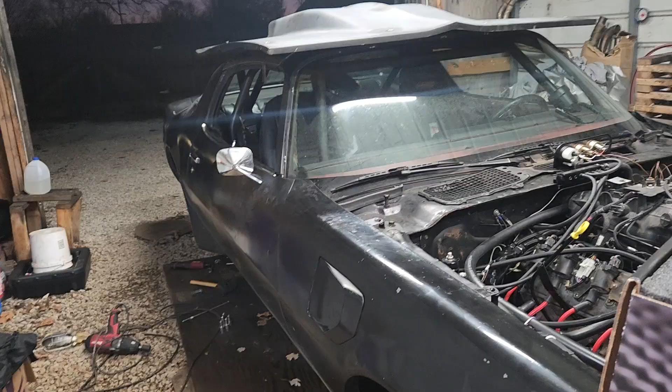Hello YouTube, got some more parts for the 80 Trans Am. We got the BTR Equalizer Intake.

The truck intake works fine, it's just ugly. I think this will work better for us.

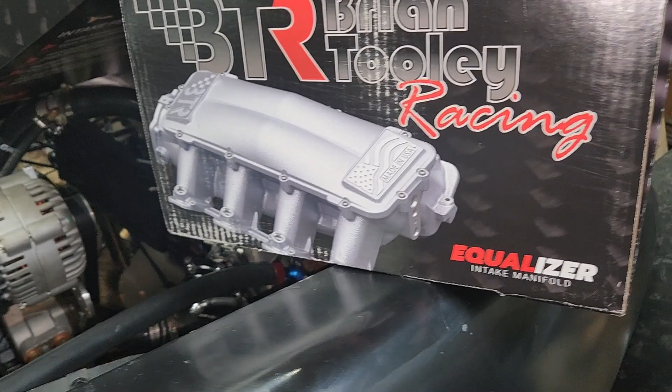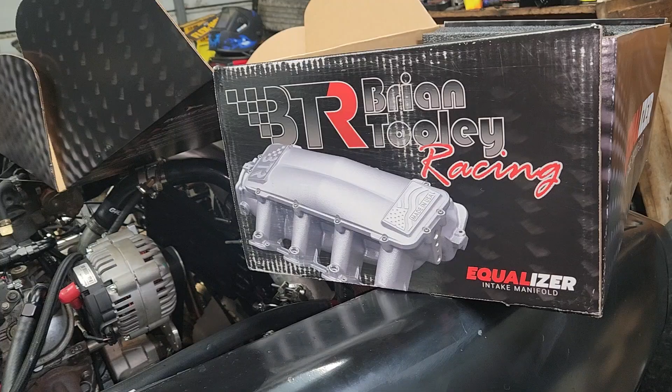This intake operates between 6,000 and 8,000 RPM. It's a short runner, but once we get going, it never sees under 6,000 RPM. 6,000 to 8,000, is that what I said? But yeah, we shifted about, I don't know.

Even if you shifted it at 65, it don't drop below 6,000. But that's just with the sloppy stage 2 cam that's in it now. We're going to put a bigger cam in it, and then we'll be shifting at 7,500. That intake will really shine at that RPM, I think.

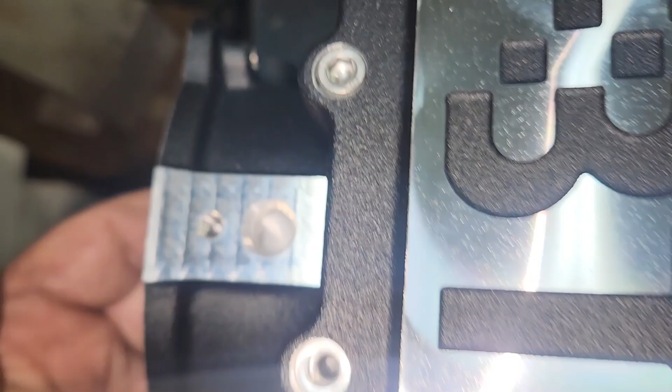And we got this throttle body. Now there are some ports on this thing that we either have to plug or use. So there's these ports in the back. There's that port right there. Well, that's not a port. Never mind, that one's solid. But there's this port right here too.

Sometimes on these intakes, there's a really big port that needs plugged on the bottom of the intake, but for some reason this one don't have that. And I've seen these equalizer intakes with that, so I don't know. We're going to figure out which ones we're going to use and then plug the rest. I'm pretty sure we only use one of them, which would probably be this big one.

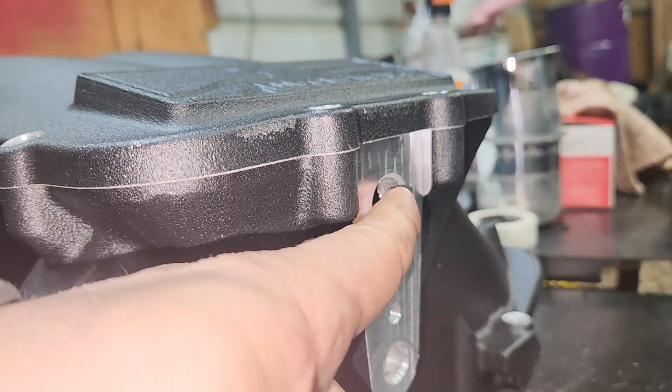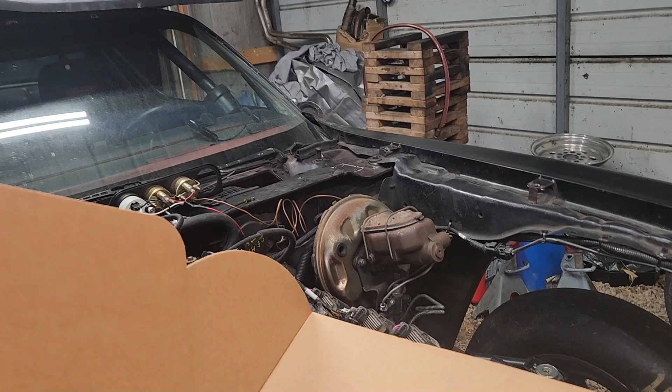That generally goes to the brake booster. Oddly enough, even though we have the power assisted brakes that's supposed to have vacuum to it, we don't run the vacuum to it because it causes a vacuum leak. That's brand new. I know it don't look like it, but it's not that old. Chris put that on there not too long ago, and it's got a vacuum leak already.

But we're going to switch to manual brakes eventually. Believe it or not, the brakes work better without the vacuum. It's probably because it's got a leak. But anyway...

We're going to go ahead and plug all these holes. See, that's a fake hole too. Yeah, we're going to plug all these holes except for this one. We're going to use that one. It does come with some fittings.

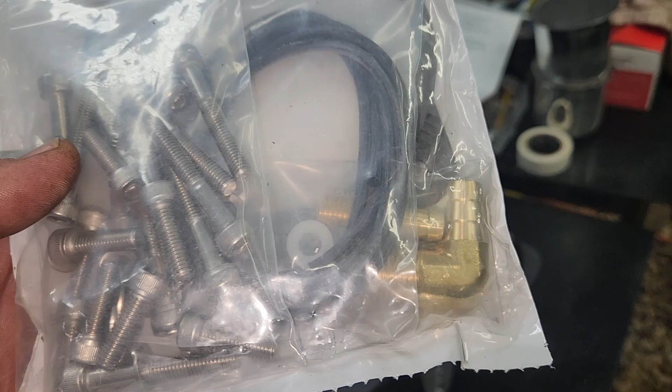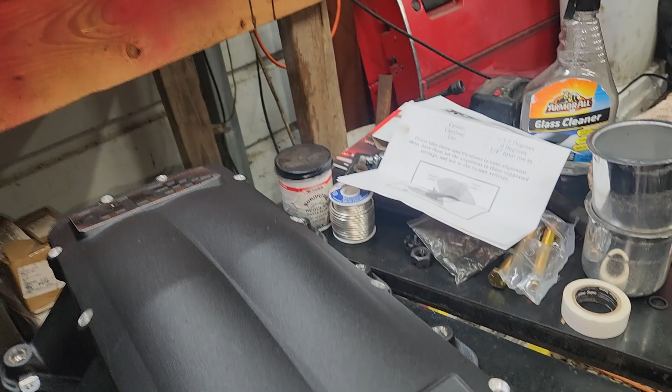And the rest of them we're just going to get plugs for, and we're going to use some Teflon tape on the threads, of course, because these are NPT threads. All right, and it comes with these bolts, I don't know, about 2 inches long, and they had a washer.

So I'm just sticking all those. I'm assuming those are the intake bolts. And these use this, but there's a gasket in here. I need to make sure that gasket's in there.

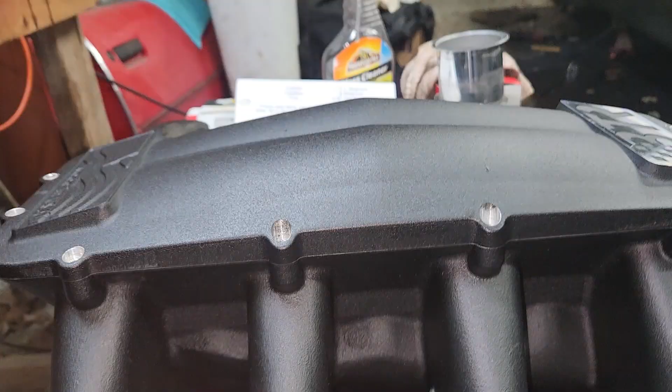So they left 2 of them in just to hold it all together. We're going to take that out and make sure that gasket's on inside there. I guess they have it like that so you can take the top off and port it. I don't know why else it would be like that.

And it came with a throttle body gasket, 4-bolt. But yeah, let's take this off. I took the 2 bolts out. They had one there and one up here.

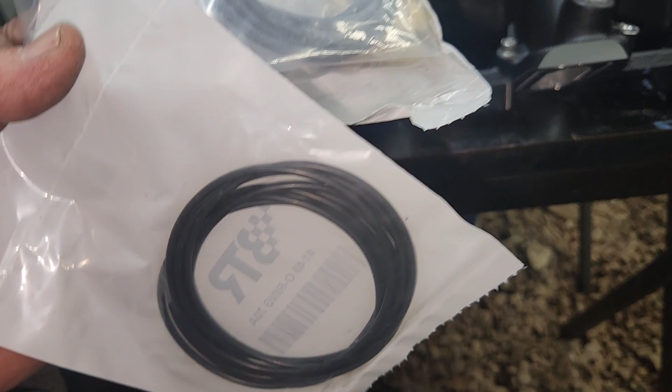See what the gasket looks like. And it does not have the gasket in it. So I'm glad I looked at that. I found another bag in there.

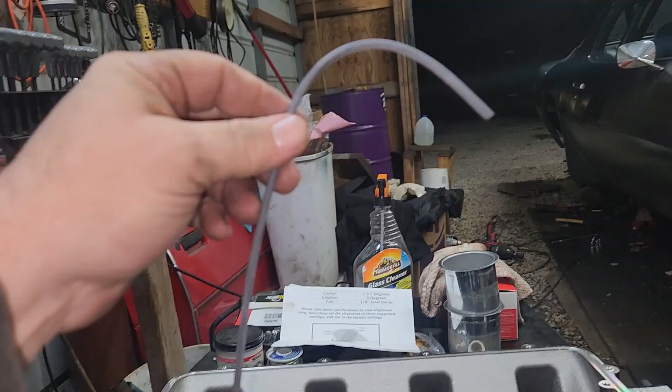So one of these is that gasket, and then the other one are these gaskets. So these smaller round ones, those are definitely the intake gaskets that go in there. And this long one is the intake gasket. I don't like that. I wish they would have made that to fit.

I bet we're going to have to cut some of this. All right, we snaked her all around there, pushed it in. You can only push it in so far with your finger. But as I expected, it was going to be too long. See?

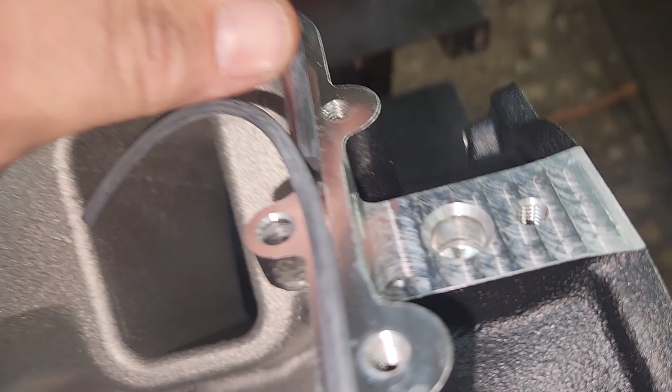I'm going to go see if I can't find some directions on that, because if you don't cut that just right, you're going to have a leak right there. I wonder if you're supposed to use silicone or anything there. There ain't no directions on the box, I don't think. Let's look more. Well, there are directions.

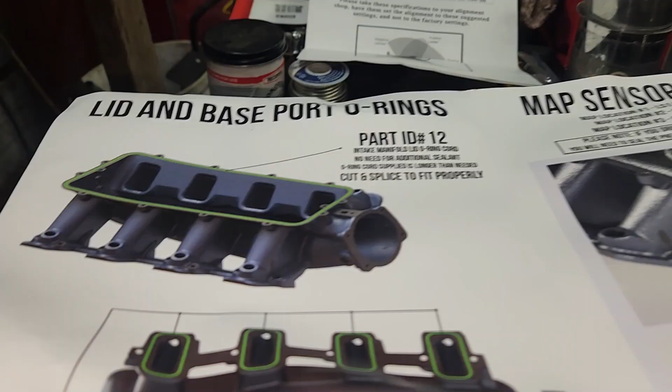Intake manifold lid O-ring cord. No need for additional sealant. O-ring cord supplied is longer than needed, cut and spliced to fit properly.

We'll have to be real careful here, because if we cut that too short, you're gonna leak vacuum. I don't know if that's a good idea or not, but I'm gonna put it right beside it, like that right there, and then cut straight down, right, just to the right of this other one. Actually, if I do it right in the middle, when I put it back over, it'll be too long, but I'm gonna go right where my thumb's at.

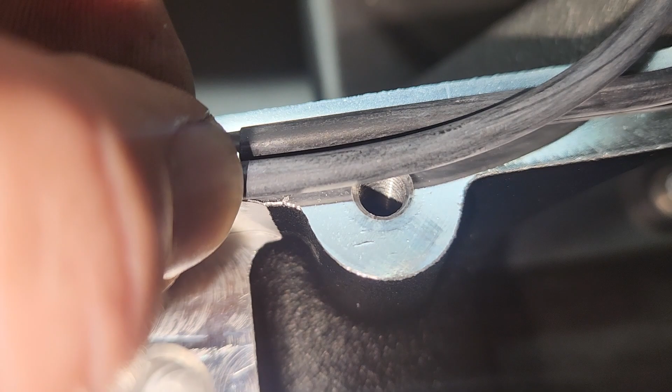All right, look at that. I think that'll work.

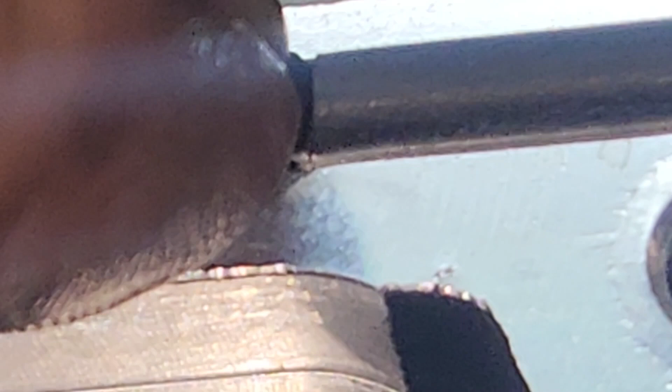Once you put the lid on it and smash that down, yeah, I think that's good there. All right, I put the bolts in.

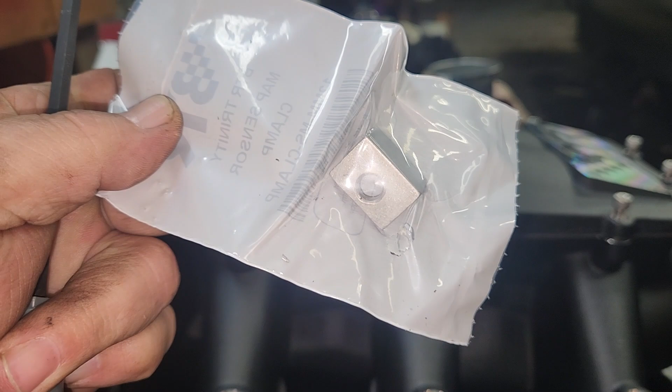I had an extra bolt. I'm going to assume that's for the MAP sensor bracket, but we'll see in a little bit. Let's tighten these down. I don't know what the torque is on them.

I'm going to snug them up for now in a crisscross pattern. I'll go here, there, there, there, there, there, there.

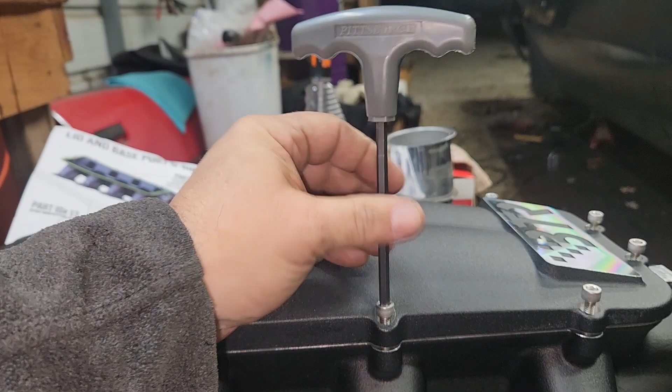On this first pass, I'm just going to snug them up, then I'll do another pass a little bit tighter, and then I'll figure out the torque, and we'll do the final pass with the torque.

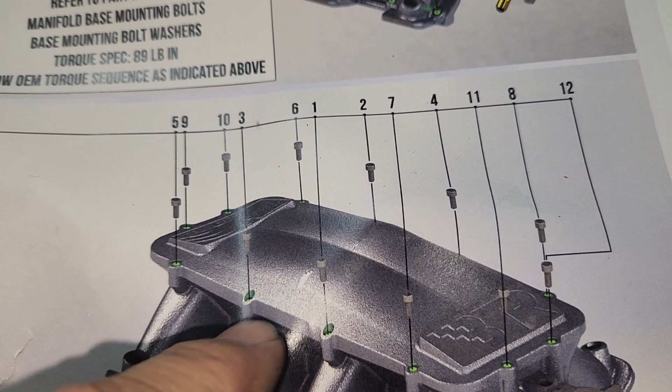So it's 89 inch-pounds, and they have a torque pattern. See, 1, 2, 3, 4, 5, 6, 7, 8, 9, 10, 11, 12.

Pretty much the same thing I did. I just kept snugging these up in the pattern I showed you, and every time I came back to the first one, it was loose. Now I got it to where I just snugged them up, but when I came back to this one it wasn't snug anymore.

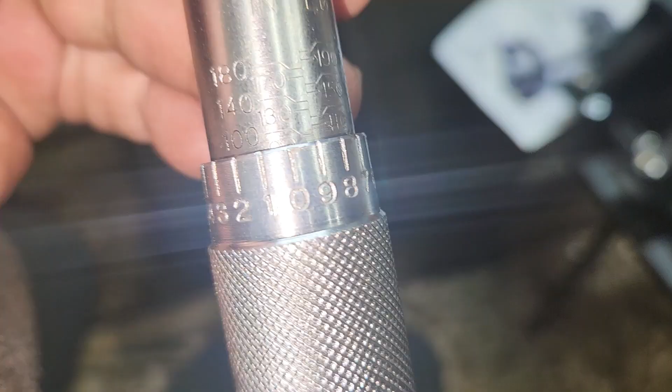But we'll do the 89 inch-pounds now. All right, there we go. We're at 89, that's the 90 right there.

All right, here we go. We'll probably go through it a couple of times. And ta-da, that's on. So back here, we're only going to use this one big port.

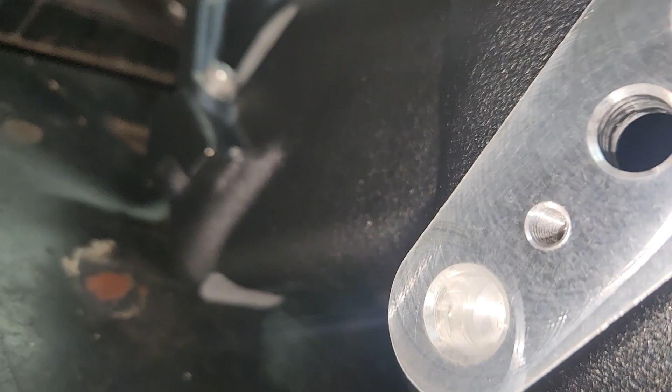So we're going to cap the rest of those and cap that one. Up there it says map location number 1, LS1 sizing, not machined for use, which would be the one on the front.

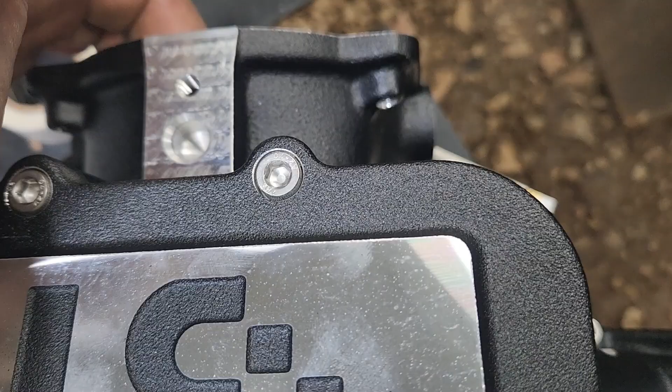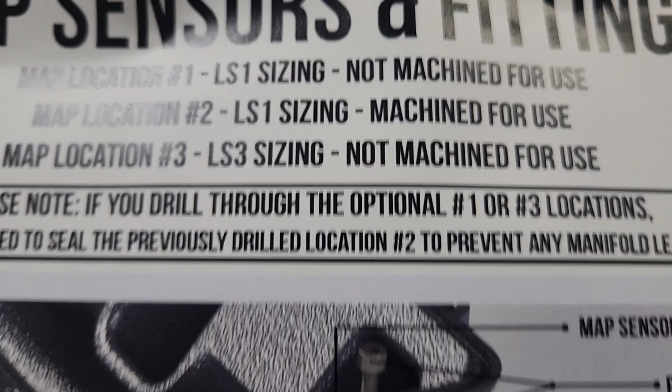And then back here, it says map 2 and map 3 location. Map location 2, machined for use, number 3, not machined for use, so we don't have to worry about that bottom one.

We can put a map sensor. We do have a 3-bar map sensor, we just don't use it because we're running the Haltech Rebel, and it just uses a vacuum line for boost and stuff. But let's go ahead and put this one in this hole.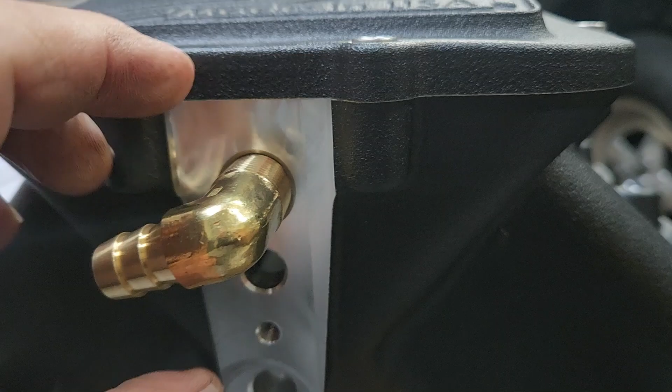We'll get some Teflon tape to put on there. Now, I did put the map sensor on there and I did plug it in, but we don't use it. I think I'll do the same thing on this intake - we'll just put it in, we just won't use it. It ain't using it, it's just plugged in.

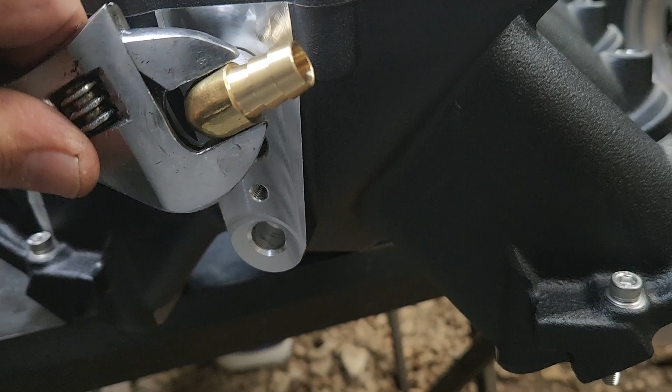But in case we ever want to use the map sensor, all we got to do is switch it in the tune. All right, I'll put some Teflon tape on her, just going to use this and tighten her up. We want it to face that way.

So unfortunately, with that in there, our map sensor don't fit, so I'm going to cut the ears off of it. A pair of dikes make quick work of them tabs, and it goes in there now.

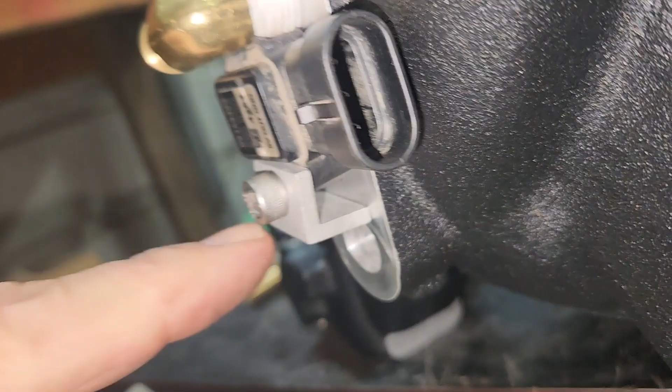There ain't no directions how that goes on there, but that's the only way I could think it goes on there, so I didn't cut the tabs off this side. The bolt went right down in between them, and then that grabs on the ledge there. Yes, sir. It ain't going nowhere, it's in there good.

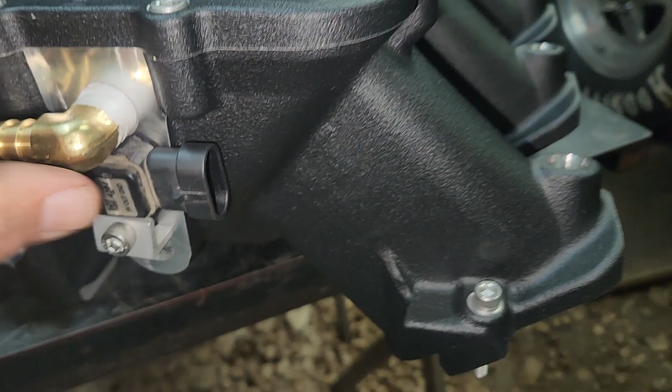Alright, and they give us this one and a plug. So we're going to use the plug up here because we're going to run it - we got a vacuum block on the fender well. That vacuum block, everything runs off of it, and we just have that one hose coming off right there for it. Alright, we got that one Tefloned up.

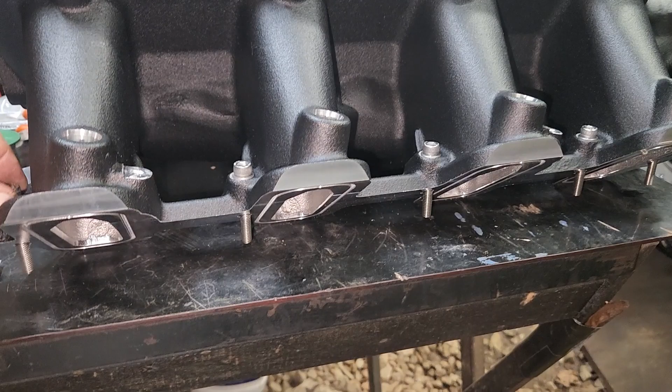Put that one in there. Now we're just going to take these out for now, flip it over and put these gaskets in right there.

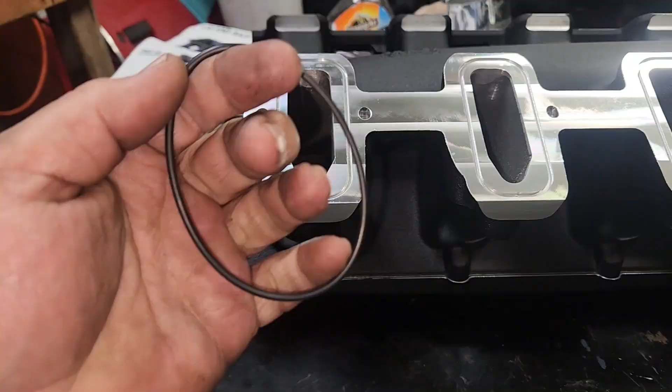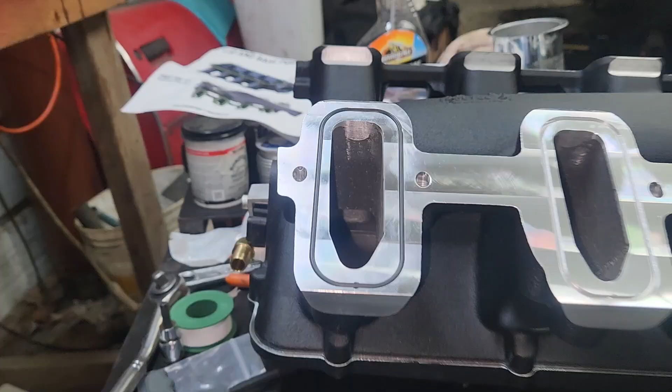Alright, these ones are not cut to fit. Again, same thing, just push them up in the grooves. And those actually push in there far enough to stay, but then they stick out just enough to seal on the heads.

Alright, there we go, they're all on and pushed down in there, and it's still sticking out enough to seal on the head. Well, look at that, I missed the hole - there was one in each side. We plugged that one, we're going to have to get another plug for this side.

Alright, let's go ahead and take this ugly truck intake off. Unplugged everything that went to the intake, the hose that goes up to our vacuum block, the hose for the wastegate pressure that came off this side over here. Now we're just loosening up the fuel rails and the intake bolts across through there, 5 on each side. Alright, there we go, truck intake off.

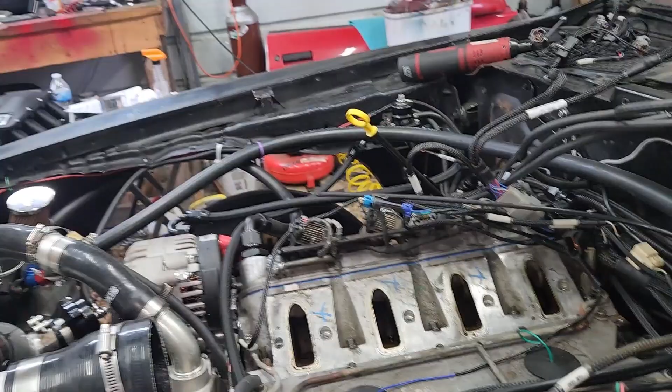Now we'll just go ahead and throw the BTR one on there, making sure we don't get in the way of any of the wires. Alright, we got our cinch down. Just looking around, making absolutely sure we didn't get any wires.

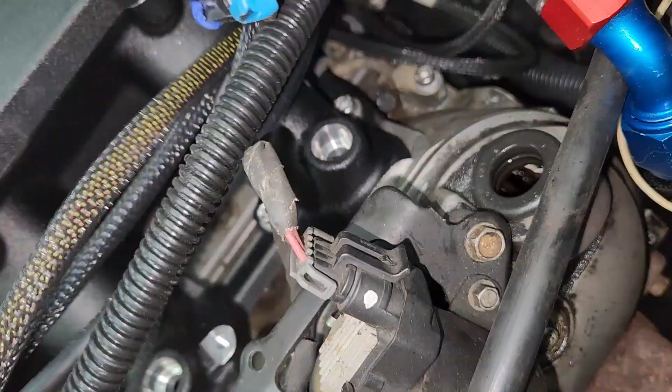Looks good to me. Now we can torque her down per the directions - 89 inch-pounds. Start in the middle and go out. Chewy, it looks good in there.

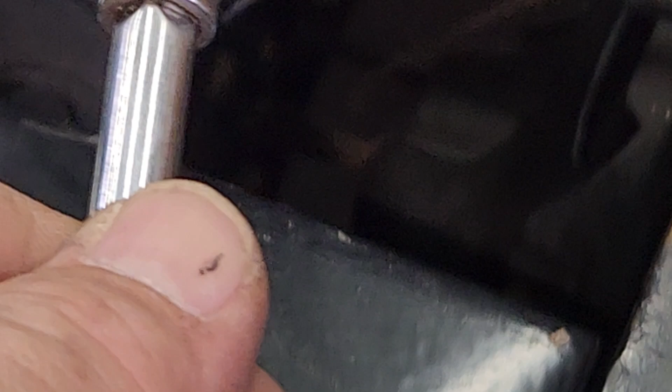So I'm taking these out. I don't even know what size that is. Let's see if we can see. Five 30-seconds, works pretty good. Those have got like a little bolt on the end of them. I screwed that out.

Unfortunately, that one's only got 3. That one's got 4. But I got another truck intake in there I can take one out of.

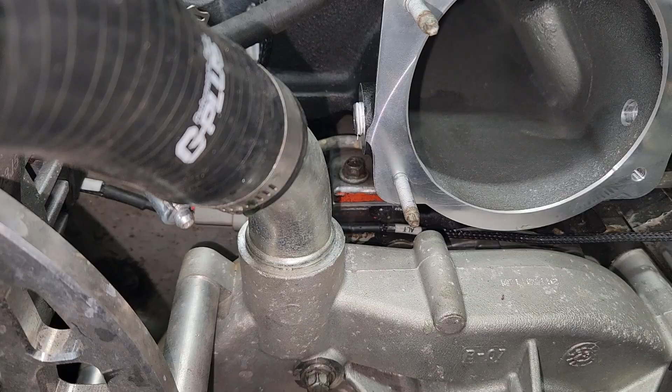Well, we've run into a problem. This right here, on there, like that right there, I'm gonna hit the water pump snout. You can run the LS1 water pump, but the problem is our bracket won't work anymore.

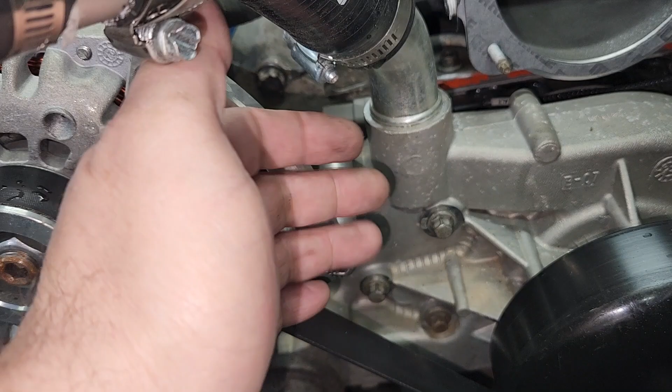We'll have to buy like $80 spacers and an LS1 water pump, and then we'll have to cut these spacers down so this will still work for us. We'll have to cut all them spacers down however far the spacer is to push the water pump out. And there is a special throttle bracket that you have to buy for this, and special fuel rails we have to buy.

Alright, so I ordered the 0.7, 7/10 of an inch spacer that brings the water pump out. This is the truck water pump, so we're gonna have to switch to the LS1 water pump. The reason why is because the LS1 water pump has the water neck coming out right here. See, if it was coming out right here, it would clear all that, and plus it would clear this belt. But yeah, I ordered a plug, ordered the throttle body bracket, ordered the fuel rails, and then ordered the spacer to move these out.

Took the water pump out. That throttle body fits on there now. That's a monster, man. That's a monster throttle body.

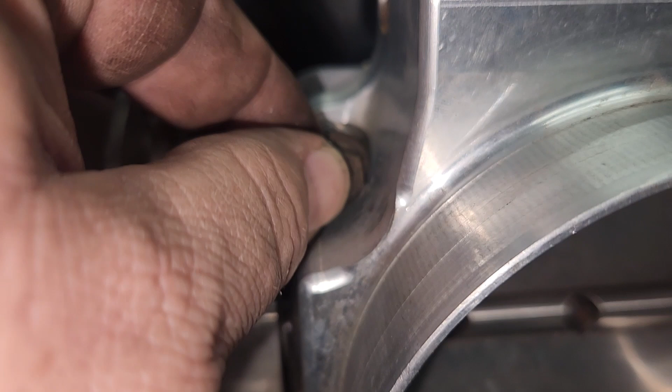Well, something else I figured out - this is the stock nut. It won't fit because it's got that washer top looking thing on it, whatever they call that. But yeah, it won't fit on there because the washer looking part of the nut hits the throttle body.

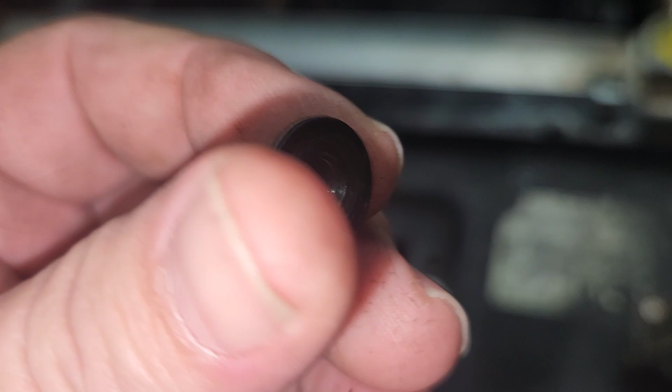Alright, got some nuts for the throttle body because it's so tight in there. These stock top washer nuts wouldn't fit, and I can't even get a socket on those, so I might have to do a wrench. And this one, I'm gonna have to take the idle air control off just to tighten it.

Alright, throttle body's on, all hooked up. Boop, boop. Alright, so I was just checking something on these, making sure the bolts weren't gonna be too long.

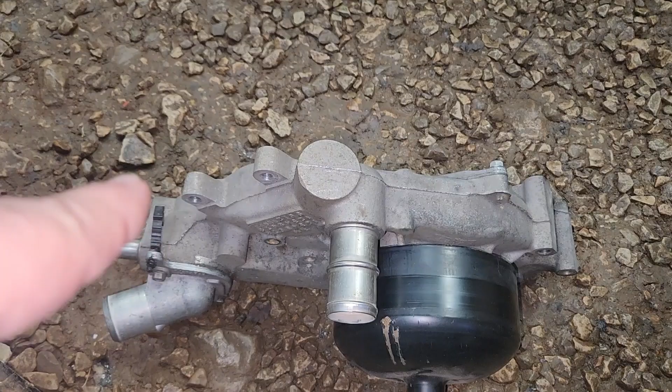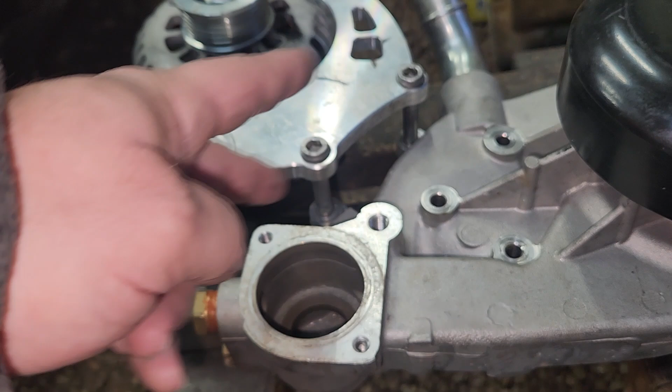I cut these down because here's the LS1 water pump - I found this one for 20 bucks off a guy I know. Now see, those two bolt holes are the same as where they're at on the truck one. So if we space that out 0.7 inches, we had to take 0.7 off of these to make that shorter.

This bolt right here should be the exact same because it went to the head. But these bolts were almost too long - you can see even after shaving them down, I can get them in there, so they're just the perfect size. But yeah, I cut these down 0.7 inches, so I'll just have to clean it up a little bit.

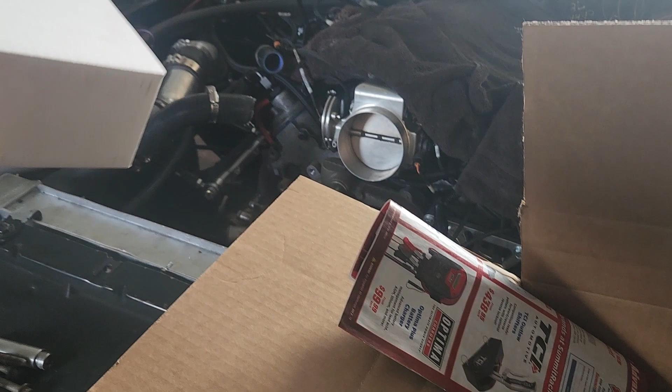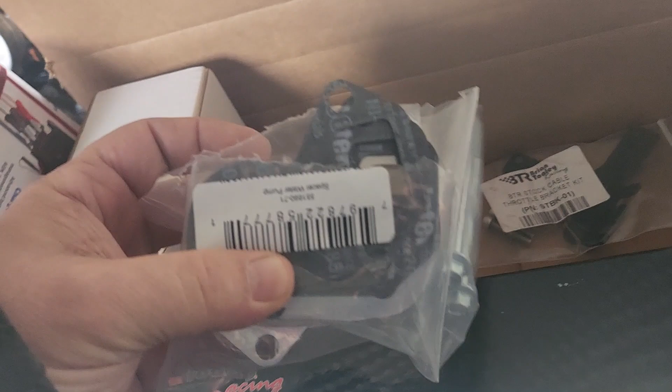Yay, we got parts. We got the throttle bracket, we got the water pump spacers. Oh, actually, this is the coupler - this is the coupler from that pipe to the throttle body. This is the throttle bracket. And this is the water pump spacer to give us truck spacing off an LS1 water pump. And this is our fuel rail.

Let's go ahead and toss this water pump on for reals. For reals, man. Alright, we'll put those on there just like that right there - be a gasket, the spacer, and then a gasket on the end. It comes with longer bolts for you.

And it comes with this little hole - you can put a nipple here, or it comes with a 1/8 inch NPT plug to plug it. But you can run your steam pipe, your head steam pipe, over to that port. And we're going to put it right there. I'm not sure if we're going to use it just yet or not, that's why I left it open.

But let's try to hold all this together, put that on there all at the same time. Alright, that's on there, leave there - clears everything good.

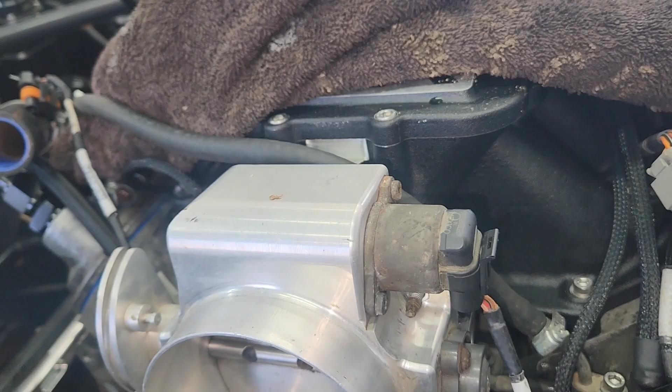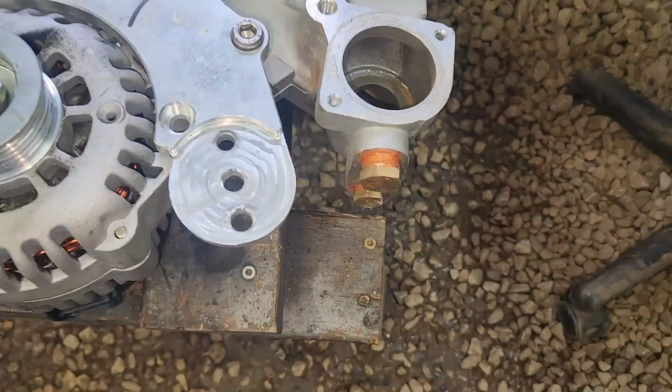I don't know if we're going to use that plug hole and just loop that around, or keep it where we had it - we had it in stream with this upper radiator hose. And I was hoping it would get these far away from this V-band so we could run that rubber loop, but it's not. So I'm going to have to tap and plug those again like we had on this one right here - that's the truck one. See where that neck comes up, it was hitting our throttle.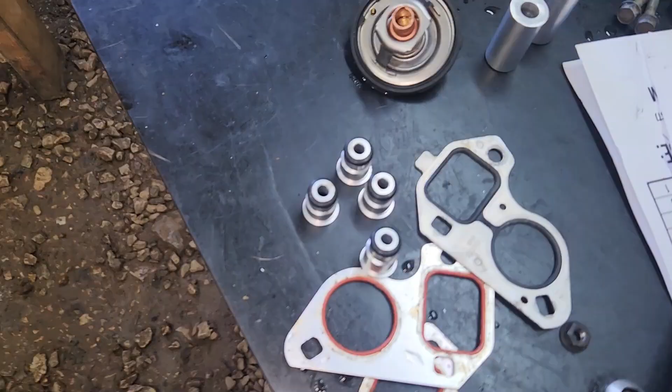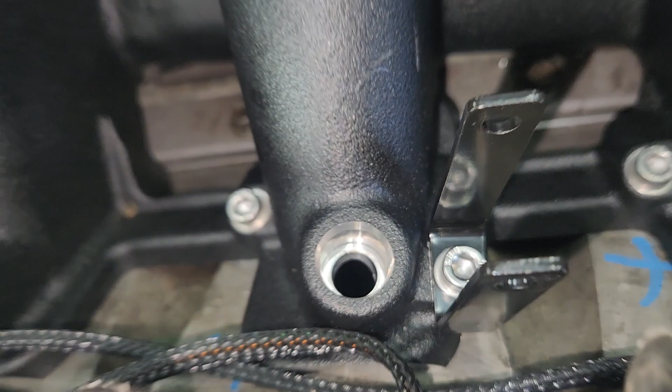Let's drop some injectors in there and put the fuel rails on. Look, it comes with 3 different sizes. I actually had extenders on these injectors, but we probably don't need those. With the extenders, these were too long and these were too short. But without the extenders, the short one looks like it's going to fit just right, so we'll put the short ones on without the extenders. I went ahead and put the brackets on, and they've got a little groove where they stay, where you put them. Then we'll drop this in here.

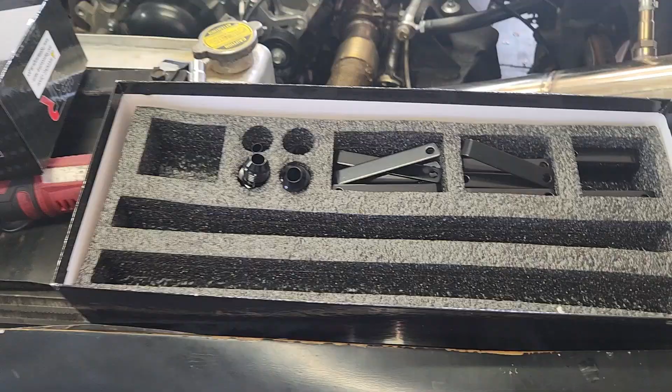Now, I don't like the way that bottom O-ring fits so loosely in this intake, but we'll know if we have a vacuum leak pretty quick. That should line the holes up. It does, and we'll stick the bolts through that way, then put a nut on the back side, and that'll do it. They fit once it pushes that down. That O-ring doesn't fit very good in the bottom, but if you push it down, it's going to seal on top of the injector and on the bottom of the top of the intake. But oddly enough, I don't see nuts for those bolts we just put in.

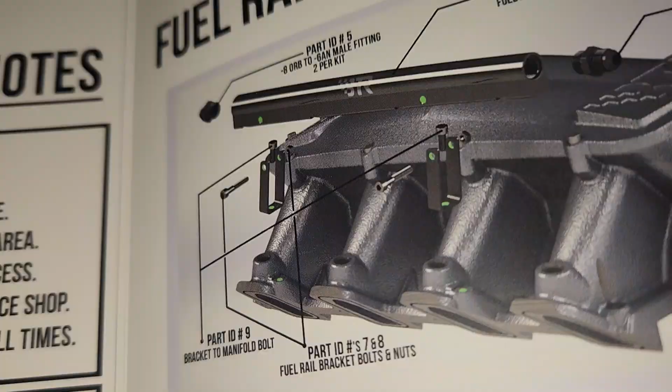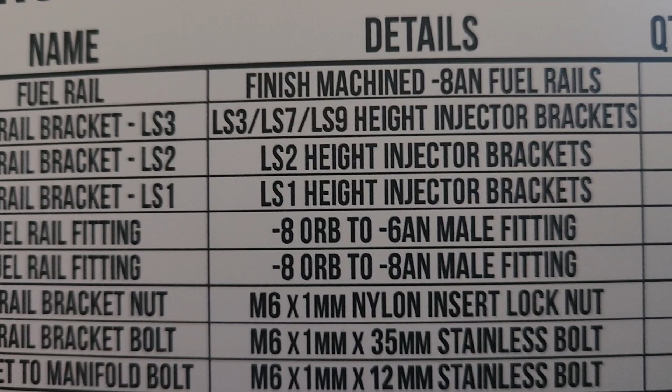I don't see any nuts either, so we'll have to figure that out. Looking at the directions, there's clearly supposed to be a nut on those. And these brackets, when they go on, there's a slanted side that goes just like it shows there. But yeah, we're missing those nuts, 4 nuts. We got the bolts, we just don't have the nuts. Oh, and also the directions will tell you what length bracket

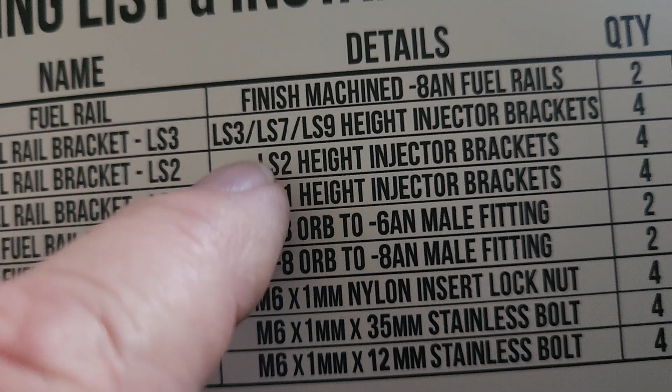will work for what injectors. So the short one is for LS3, LS7, LS9 - I believe ours are LS3 injectors. The medium one is for LS2, and the tall one for LS1s.

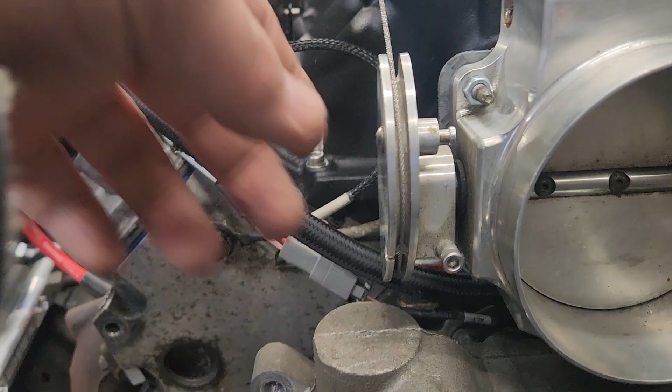That's all done. We got the throttle cable bracket on, and it fits a little crooked, but I went in there and hit the gas 100 times and it doesn't come out of that groove. It does go wide open throttle - we checked that. My cousin and a buddy of his came over to get some parts they needed for a 6.0 build.

But yeah, what are we going to do now? Oh yeah, so this doesn't line up now because it was up higher, so we're just going to cut a little bit off this and see if we can get it to line up. All right, I just cut about a couple inches off of that - that's it right there.

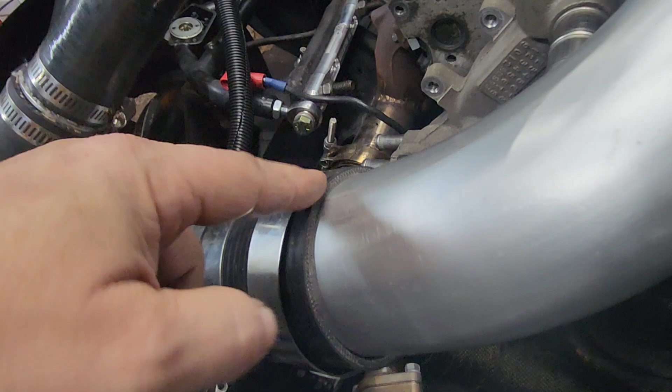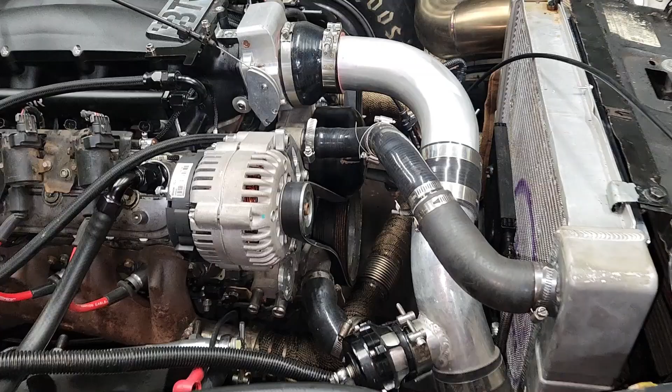And it fits perfect. All right, so we're going to flare this in and button that up. Then we just need to find something to do with this radiator hose. I had a bunch of this hose left over from what I ordered for a truck. That should curve straight up just like that, and then just connect them right there. Yes, yes, all right, there we go on the radiator hose. That looks good, look at that - fits like a glove.

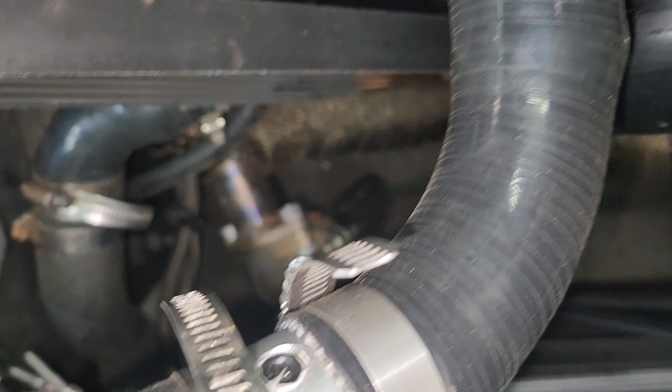But on that head steam port hose, I decided to loop it around and down right there, just like that. And then on this one, I just plugged it with an 1/8 inch MPT, and we also got to plug that hole - I got a plug on order. Plug on order, and we need to figure out a new way for our bottom port for our wastegate turbo pressure going in. We might have to tap a hole right here or something. All right, put that plug in there.

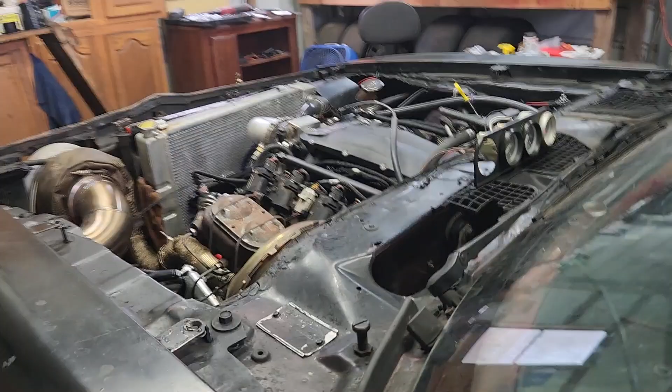We should have it enough to start it. Ain't got no water in it, just can't run it much, but let's see what it does.

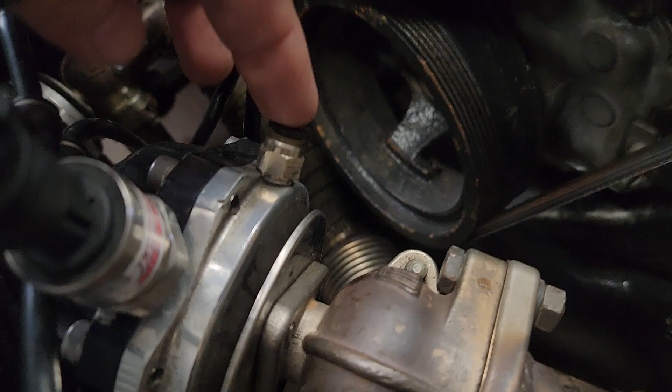Alright, so what I'm going to do now is take those regular nuts off. I bought some locking nuts - put locking nuts on the fuel rail for our wastegate pressure. I'm just going to come off right here. You should do it as close to the turbo as you can, but oh well, whatever. Before, I was just using the PCV clean air off the throttle body, so it'll be fine. I'm just going to drill and tap 1/8 inch MPT and put one of these in there, and run it from here to the bottom of the wastegates on both sides.

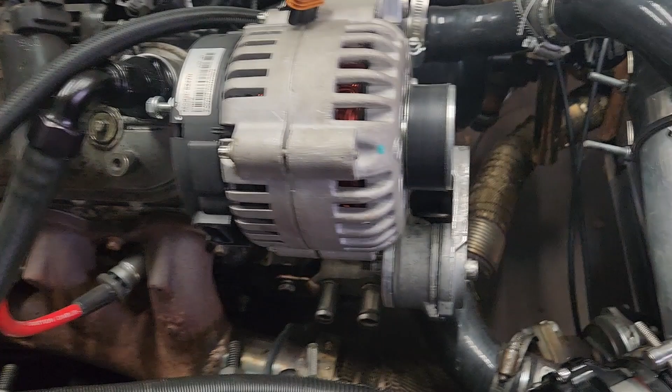And then I need to hook the alternator up - it's not hooked up. Need to readjust the belt, it's too close right there. And then I just need to tap and plug these and put the thermostat in it and put some coolant in it. That's going to about do it.